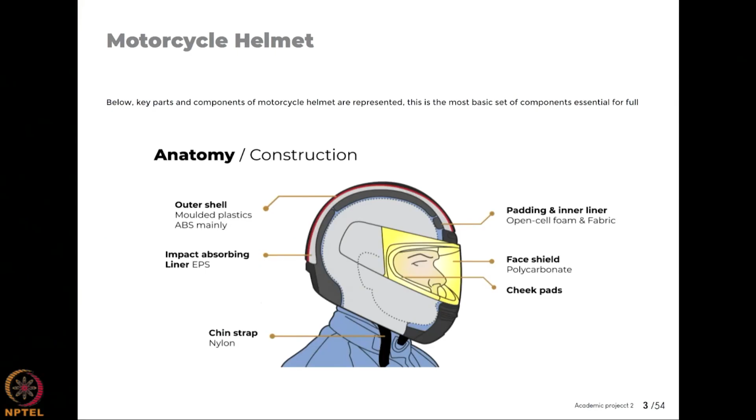There are some other components too, but these three were the major focus when I was designing or redesigning this concept. There are some more key details about what these things are.

Now here comes the first bump in my project that I never imagined - there are standards when it comes to protection gear, specifically things like helmets that have to be used under high pressure or high performance. There are regulations and rules generated by our government that every manufacturer or designer has to follow. A lot of those rules are about modification of these tools.

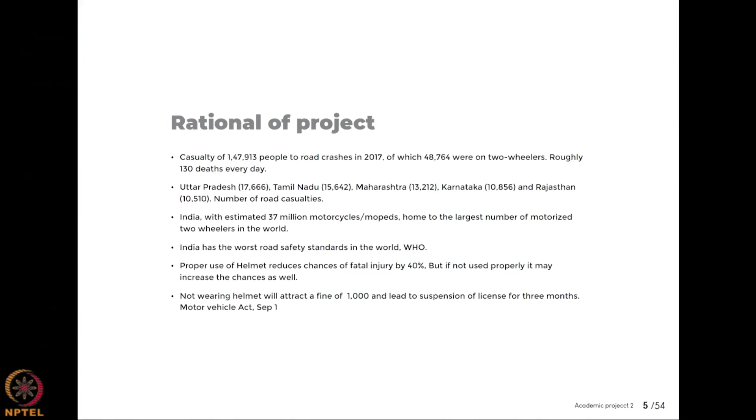You all know how it's a kind of crime to even change the paint of your motorbike or car - you cannot even change the engine capacity, handlebar, mirrors, or anything, but people do it anyway. So before designing this, to make my modifications more parallel to a marketable product, I learned and went through the rationale and rules governed by ISI in India, and tried to make my modifications within their guidelines.

Now, there are some user studies before we commence the designing or ideation process. We go to the cool sketches and all that, but we always go for some kind of data clarification first, like what this problem is about.

So the first step was research. We went and interviewed lots of professional people, professional bikers, daily commuters who have to travel like 150 kilometers per day to some regional site, work there and come back. Mumbai is a very good place for finding each and every category of such people, specifically those who commute out of Mumbai to work in factories on the outskirts and come back.

So there are some factors we found which we need to look after. First was discomfort, for which we are redesigning this product. Discomfort being: you're riding on a very sunny day, you start sweating, and there's no ventilation, no wind coming in. Even if you open the visor, there is sweat formation and it doesn't go anywhere, so people try to take the helmet off while driving, which in most cases leads to accidents and fatalities.

Second is storage and management. There are other problems I took into account which I felt I may solve or incorporate into my design so they get resolved as well. Storage and management is an issue - lots of people are just carrying their helmets while walking into the mall or somewhere. Then reduced senses - lots of helmets, specifically in the lower end market, reduce noise or honking sounds from behind, and you can't hear what people are saying from outside even with the lid open. We need to look at that too.

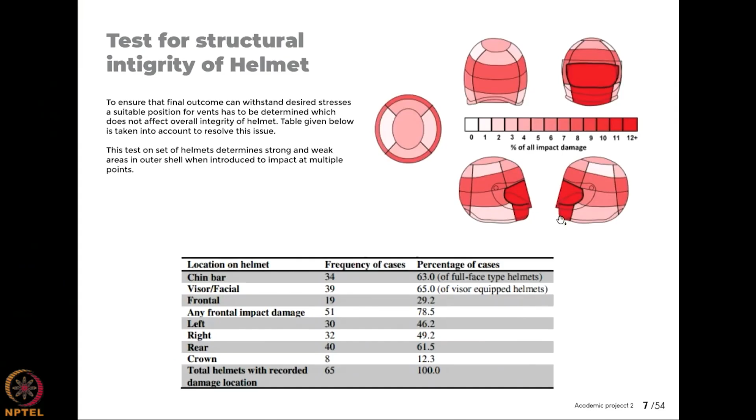So we affiliated one of the tests done by ISI and some global standard bodies, to test out how and what segment of a helmet shell performs under different kinds of stress loading. The darker red areas are more prone to break under heavy loading, and the whiter the area gets, the lesser prone it is to break. You can see there are lots of areas which do not break no matter how impactful the accident was, while some areas, like the chin guard, break in a second.

So after digesting all this data from the ISI load test and the BIS standards, I redefined what my objective was. It started as an idea - I need to redesign a helmet which is more comfortable for the Indian market - but now I had clarity about how I'm going to achieve it. I had standards in hand, lots of user studies, solid data, and I knew what direction I would take. So I created a kind of design brief.

So the design brief was more about - I ended up calling that helmet design Venta, because it was more about vents and it was more about strength.

The primary brief was to have good air circulation at even minimum speed of 20 km/hour. How we reached that specific number - that was the bare minimum speed you have to have while on a very busy road, right? Unless you stop, obviously it won't work. You could have air circulation in stop position as well, but you'd have to have an electronically controlled or temperature controlled helmet, which is very costly and not even available in the Indian market nowadays. So when you're riding the bike at least 20 km/hour speed, that thing has to work and provide good air circulation inside.

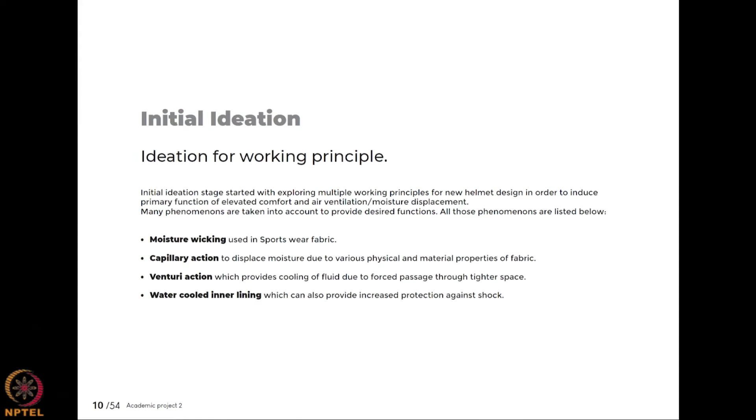Then there's capillary action - capillary action and moisture wicking are kind of the same thing. Then you have Venturi action - when you pass air through a very tight space it gets cooled down and you have that coolness effect. Then you have water-cooled inner lining as well - that's more like what we have in water-cooled PCs and CPUs, you run cool water through it and get that coolness effect inside.

Just imagine a helmet where you have a liner with a cavity inside, and there's a pump or even a cap somewhere in the helmet. You just stop somewhere, buy a cold water bottle, pour some water in it, and wear it - it's cool over there. In fact, this kind of thing is actually utilized by lots of sports equipment out there - there are lots of all-season or 4-season biking jackets which have these kinds of things in them.

The first of my ideation sketches was more about having a huge chunk of air vents in the front to capture more wind while driving at low speeds, and to have some kind of cross ventilation going on so that you have pressure development going on at all times. If you're just capturing the wind and not allowing it to go outside or leave that volume, then after a few minutes or seconds it will stop working. So you need to get the cool air in, mix it with your sweat, carry it away, and make it exit also from the back.

So you can have this whole circle going on and on and on, correct? There are lots of details in this sketch which do not make sense right now. It didn't to me as well. You don't need to have all things fixed into your first sketch, but the things start developing from this stage, right?

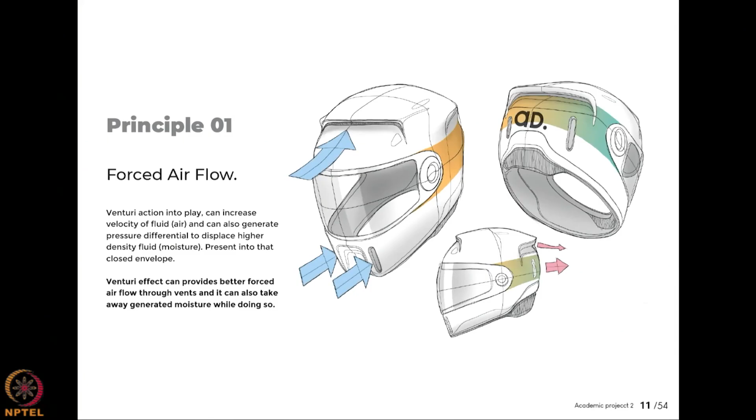So that was the first thing, more of a Venturi effect. You are passing air through some very small cross section, and you're getting this coolness effect, right?

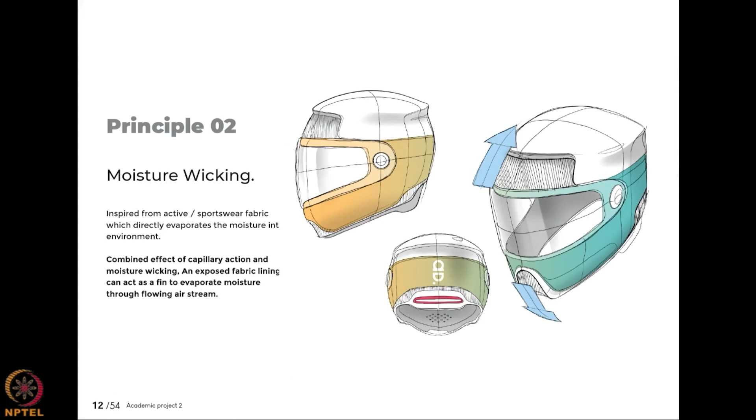Then there is moisture wicking. Imagine you have some kind of sports fabric on the outer shell or inner liner of your helmet, protruding outward, and what it's doing is taking all the sweat from inside, transporting it outside and wicking it out. It works because the fabric outside will be very dry due to the outer environment, while inside there will be lots of sweat, and moisture tends to move toward a drier state, so it travels within the fabric. That was the working principle.

This also has some aesthetics which suit this working principle. Now obviously we tested it out. We had some mock-ups going on, not a wearable helmet specifically, but some form where we tested if the Venturi effect or air slot thing worked better, or if moisture wicking worked better. We found the air Venturi effect works a lot better than moisture wicking, which only works to some extent. Beyond that, if you have hyper sweating issues, it just stops.

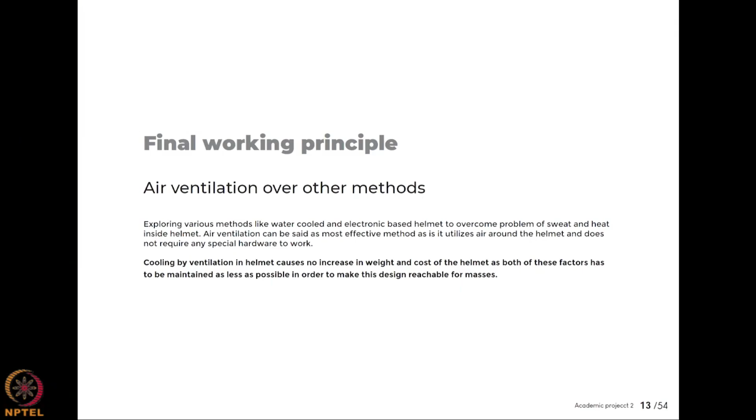So that's an issue, and we went with air ventilation, some kind of wind slot into the helmet. Now the problem with that principle is you have to dig or make holes, which makes your outer shell weaker. The air has to enter the chamber and exit at some point as well, so again BIS compliance and all that comes into the picture.

Apart from these two principles, we looked at a lot of other principles. We didn't stop there just because we had two processes. We looked at many other options, but found these two to be very interesting.

Once our final working principle was fixed and we knew what we were going to do, with that principle in mind, we started working on the details. The first thing I redesigned was the EPS layer.

This EPS layer looks a lot like a bicycle helmet, but it's not one—it's just the inner foam or thermocol layer of a regular bike helmet. It has this bicycle helmet aesthetic because bicycle helmets are designed to work without a shell, with crevices, cuts and grooves for higher air ventilation. That's why people sometimes wear bicycle helmets while driving small mobility vehicles—you've seen people driving EVs wearing those because it's better for ventilation.

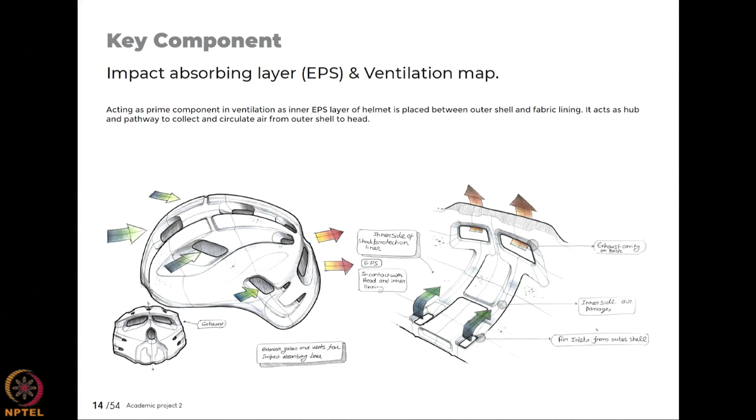You can see there are lots of grooves on the top surface and the bottom surface. This sketch represents the inner side of the EPS layer where your head is in contact. The green arrows represent how air gets in toward the inside surface, with canals or channeling going on. So even with a bigger head in tight contact with the EPS layer, there's some space for air to move around. But those channels can't be too huge either, because the less EPS material you have, the harder your impact will be—so you need a good balance between the two.

That was the first thing I redesigned, and I tested it out as well. For testing, I'll show some images of how we did the rigging and how we tested it out with some bicycle guys and some motorcycle guys as well.

The next thing was the second concern in my brief, the aesthetic part of it. If something new is coming into the market, something developed or better than the previous one, it has to have its own visual identity.

Nowadays a lot of EVs are in the market, right? But you can simply identify an EV version of a car from its petrol or internal combustion version of it. You people can do that, right? Because EVs have their own characteristics and their own design details in the outer shell. I wanted the same kind of ideation working here. This helmet has to have some aesthetics that people can understand and visually see from a far distance as well, right?

So for that we had some key factors for this whole project. Our ventilation is the first factor that we have to ideate for. Then there was comfort, then high-tech visuals and all those things. So we just took these keywords and I started sketching based on them, like what a 100% or highly ventilated helmet should look like. In spite of what we have as a working principle, I just started ideating on that, right?

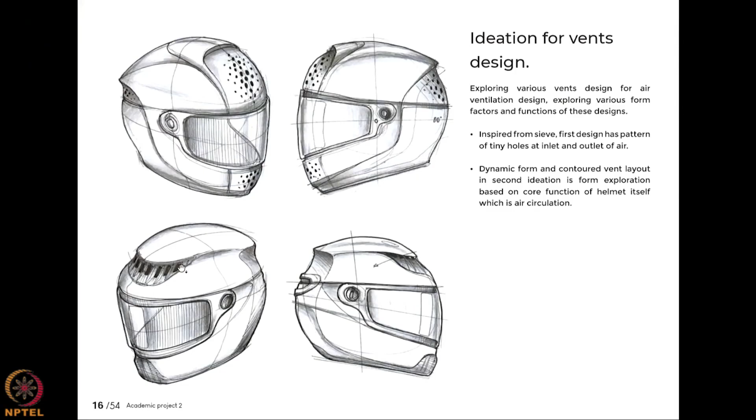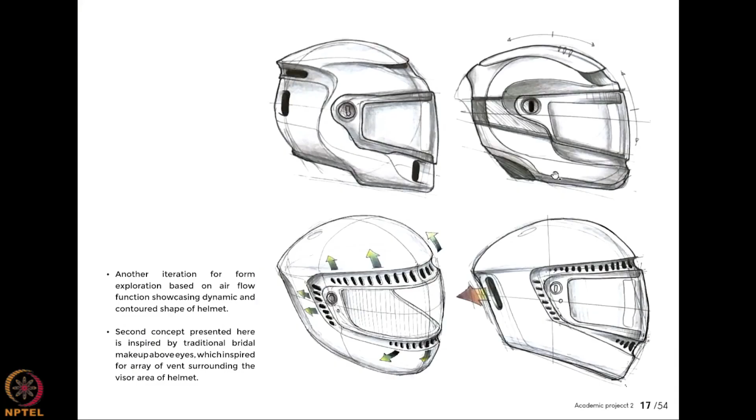So we have some very huge grills. Doesn't matter if this is going to be a very practical design or not, I just try to explore that, because later on we can tweak it into our own practical designs, correct? So I had some sketches here, all very heavily based on ventilation aesthetics, how a ventilation helmet will look, right? Which has very huge chunks of pores in the front, and then lots of huge slots on the back and all that stuff, correct?

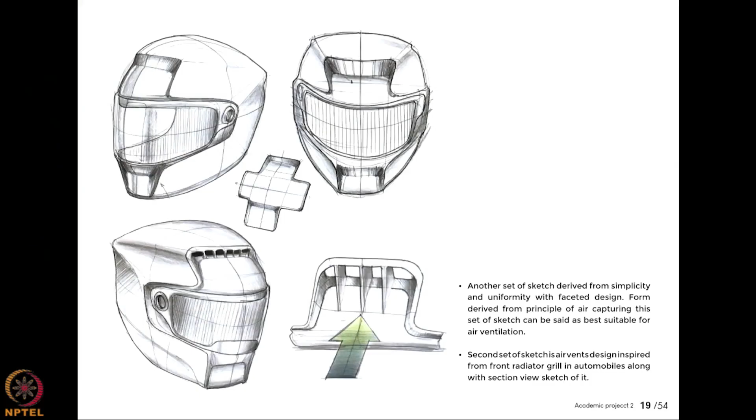After these kind of details and aesthetics, we move towards the detailing part, because in this country we have all different kinds of seasons, and this newly designed helmet has to perform in all of them, right? What if in summers a user wants that Venturi effect or wind effect, but what about winters and what about the rainy seasons, right? Then do we want him to buy another different kind of helmet, or can we make our helmet convert into the normal one, right?

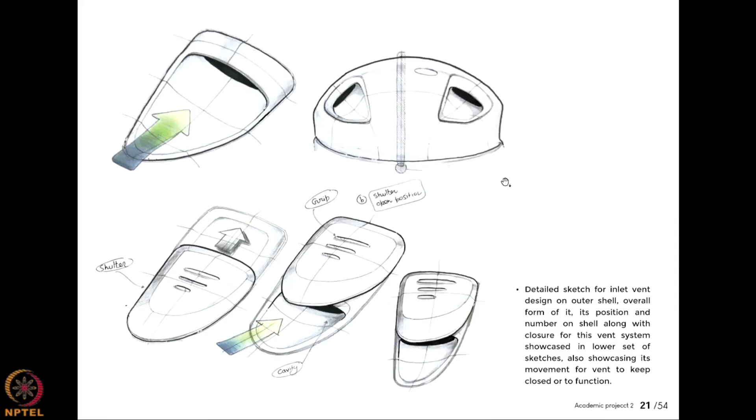So we explored all those possibilities, sketched towards those, like collapsible or closable enclosures and all those things, right? These are quite common details among normal helmets nowadays as well, right? You people must have seen that.

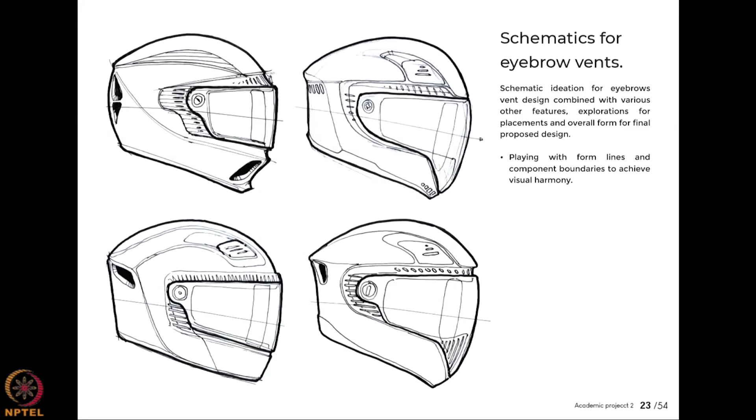Cool, so we keep on ideating some more forms, some more proportions. What you are seeing here is more proportion work, like how we can take one line of a helmet and tweak it a little bit to change its aesthetics, right? Which one looks better, which one looks more functional, which one looks more practical, so on, right?

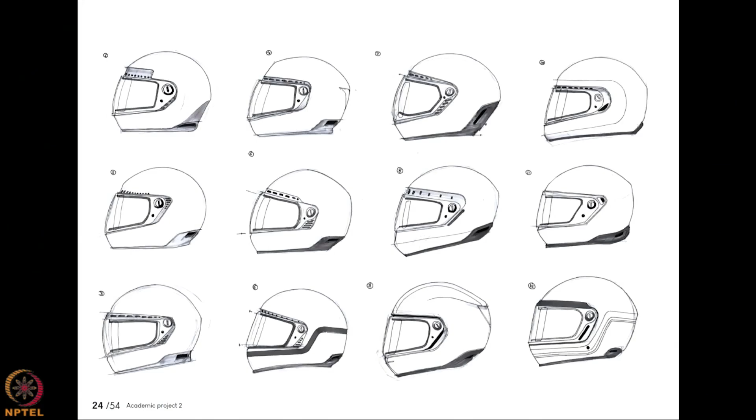So these are more of the sketches for that. They all look kind of classic, old school helmets, because I had that in my brief as well, that I want to make it look more solid, because we had in mind that the old stuff is more stronger than the newer stuff, right? So we had that classic helmet theme going on.

Then there's one process I got introduced to in this project by Chaku sir, called affinity cluster. Affinity cluster is a process where you take a lot of the sketches you have done before and cluster them out into multiple groups, right? So we'll see how it works.

So you can see all of these, you have seen all of these sketches before as well, right? But now here they are all clustered into one single word called ease of airflow. They all represent one single word, ease of airflow, right? And there are some highlighted ones which represent this word the most - like these two represent ease of airflow the most among all of these, right? Then you have this one hero concept which is kind of an upgraded or combined version of it, correct? Which we will discuss about later on.

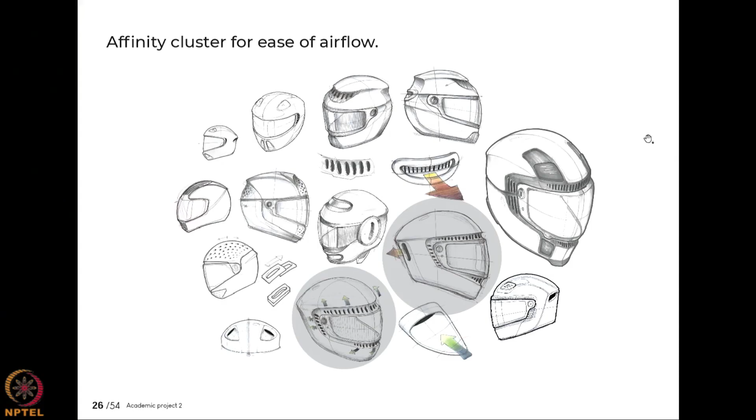That's more of a visual or digital representation of it. So you take all these sketches and your hero presentation, these two, and combine them to have one single design which is 100% there for the word airflow or ease of airflow. In this frame, this helmet represents the most amount of airflow visually. It works, or it doesn't, I don't know, but visually it looks very aerated, having some kind of tech which will ease the comfort and airflow a lot.

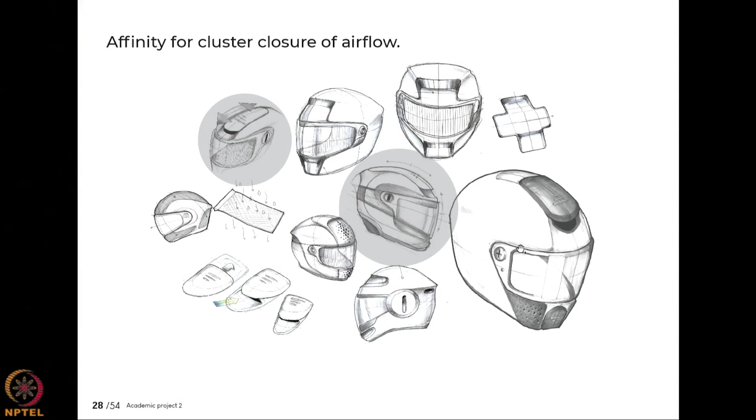So that's a good point. Second was about closure, the ability to change the airflow property of a helmet, to be able to use it in all different seasons. So we have all those sketches, those slots and details, two heroes, and then we combined it into one single helmet, rendered over there as well. So this specific model represents closure of airflow.

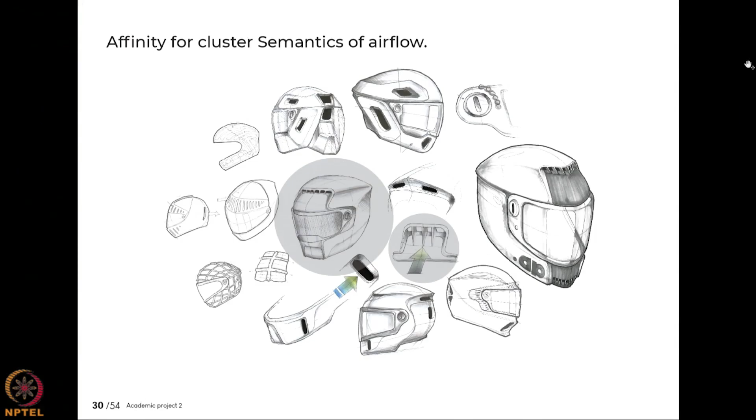Then we have third, semantics of airflow. Semantics, meaning visually, what a highly aerated helmet will look like. So heroes, then we have this one concept. Now we have all these three helmets which represent three different segments of this project. One is very functional, one is closure of function, one is visually functional. Now what if we just combine all three of them, then we'll have each and every segment that we wanted in a proper amount.

So that's what we did. I'll show you the end result in the last slides, but the aesthetic work ends here, because after that we need to test our helmet in the physical world. So after this slide we will discuss how I made a prototype and how we tested it against the real manufactured helmet, and how it performed.

Let's discuss how I rigged a model and made it compliant with our new designs. First of all, I was designing this helmet for a lower end market, something everyone can afford. In the higher end market we already have lots of tech and helmets with ventilation features, they don't perform that well, but they have it. Even nitrogen cooled helmets nowadays in market are really expensive, but they exist.

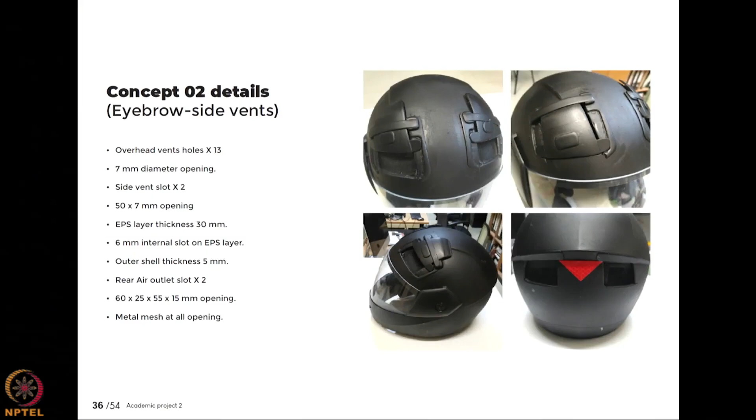So we actually bought two of those. One got modified with these ventilation holes and all, and the second one was kept as it is, factory fresh. While testing, the riders were doing the same distance on the same vehicle, same climate, same time, but using two different helmets on two different rotations. Based on their experience or verbal feedback, they were able to rate their experience. So we had this test.

There are multiple parts of it, multiple vent types in that concept which I wanted to evaluate - which one is working or contributing more towards the airflow or comfort, and which one is not doing as much work, so that we can neglect it and make our modifications as minimal as possible.

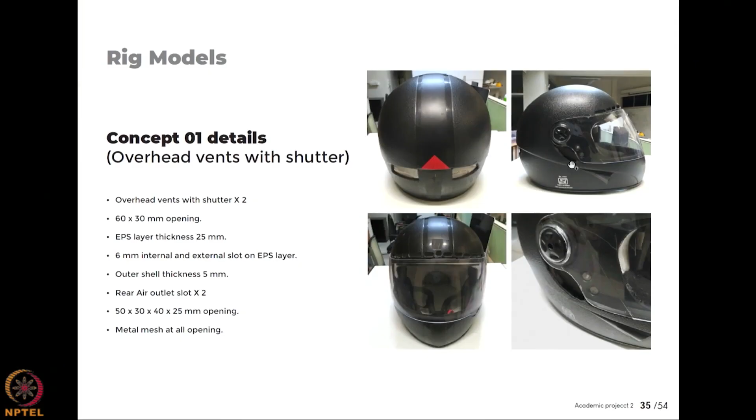So we found both of them doing pretty heavy work in ventilation. Like in concept 2, you have these eyebrow holes and then ear holes as well, side vents. So we ended up keeping both of them because they were both contributing a lot to the whole experience at different speeds.

Okay, then there are some feedbacks. Then we went to test number 2. Test number 2 was more about what if we change the size of the cutouts gradually, then how much will the overall comfort change.

So we just told multiple drivers to drive around the same path. Every time he completes a rotation, we tape the vents a little bit by a few mm and then read the reading again. By the end of the test, the vents went from 12mm to almost 4mm.

Based on those changes, the riders were able to rate their comfort level. We found that after some point it got stagnant. This way we were able to optimize our cutout dimensions - how much we need for how much comfort.

So some of the data over here. Why we are doing this test is basically to understand the bare minimum dimensions of those vents. We cannot have very huge cutouts in the shell because that will make the shell or helmet very weak. So we wanted to make it as small as possible, but without compromising comfort.

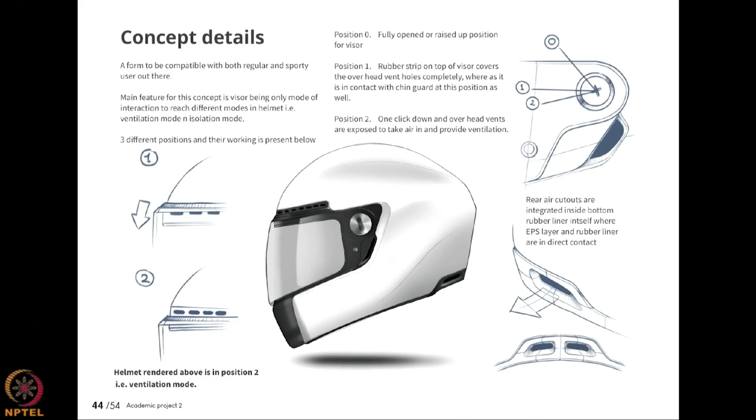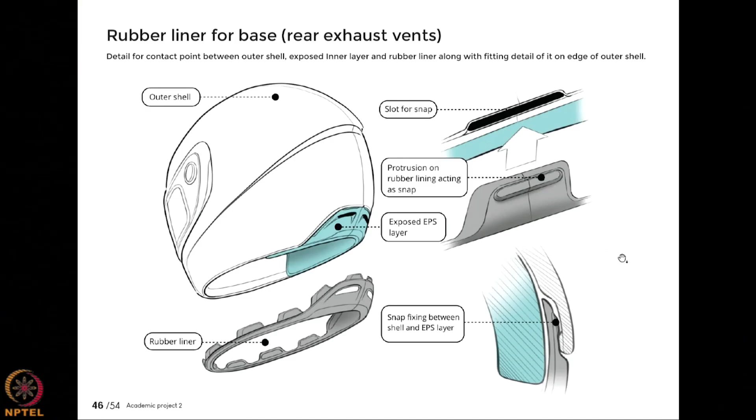Some more details, some more fitments and manufacturing details - how it will come together, how manufacturing will be eased, because a good design is not just about how it works or how it looks, it's also about how it comes together and how it will be made practical. So we had these details and all the sketches figured out. We have all the different iterations for it, keeping in mind all the data from the tests, and some other details as well.

You can see that. Okay, so we worked on the padding as well, the liner. Apart from EPS and shell, we worked on the liner as well, and then we had our final concept.